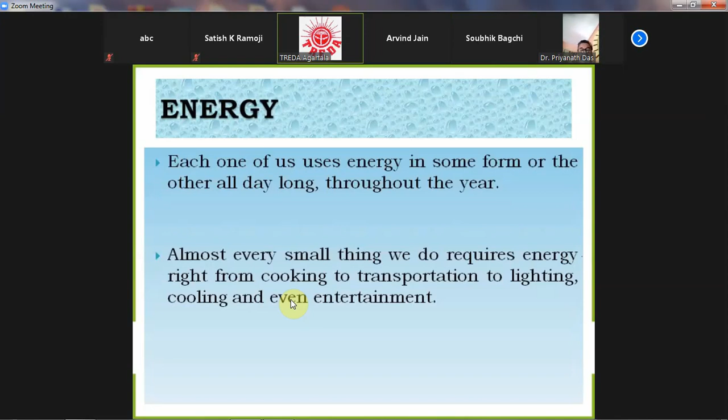Everybody knows energy is required each day for various activities, from cooking, transportation, lighting, cooling, even our entertainment. Energy is the prime mover of the development process. Energy consumption is correlated with our economic growth as well as our society's development. Economic growth calls for increasing use of energy, but the challenge is to meet this energy in a sustainable manner.

Today, the quality of life of individuals in our society is quite dependent on energy choices. Security of a nation mostly depends on the nation's energy resources and power sources, and India has fortunately developed some sources, both renewable and non-renewable. This lack of energy sources affects our human development, health access, education, socio-economic status, and environment. Today India is fortunate to have both of these sources.

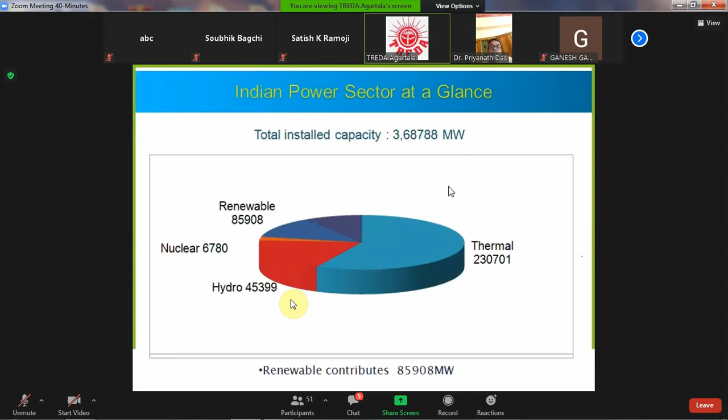If we see the power in our renewable and total power, the renewable share is actually 85,908, which is near about 22% of the total. But now the Government of India has decided that by 2030 there should be 40% - this is the target of the Government of India for renewable power contributing to the national grid.

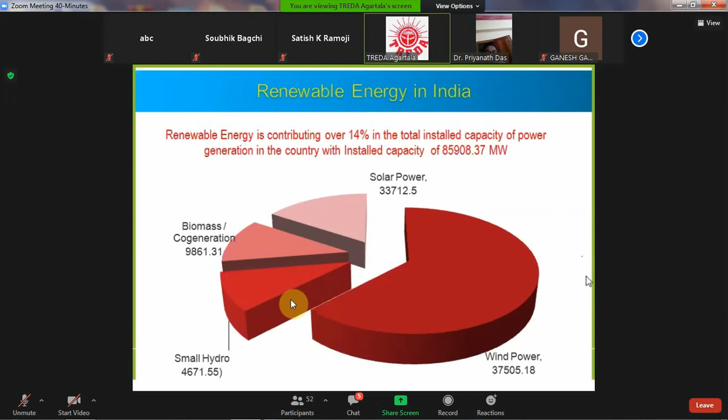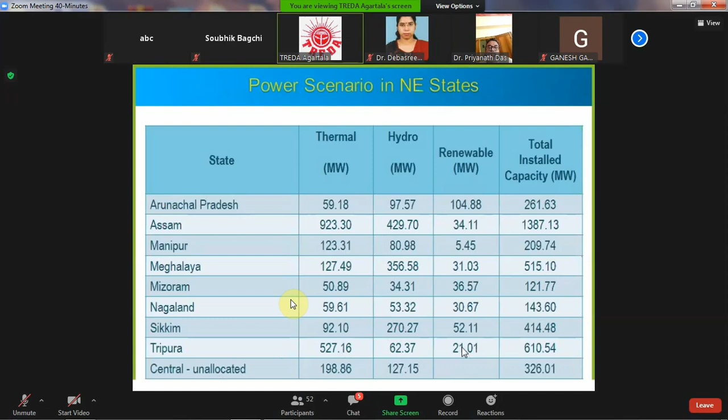If we see the power scenario in the northeastern states, basically in our Tripura, total thermal generation is 527, hydro is 62, and renewable from various sources is 21. There is one small micro hydel also, and this is our Tripura scenario of 610.

If we see the power peak demand in Tripura, this is 306. Roughly we have estimated that in Tripura we have already covered 191 households in our rural areas where grid connectivity is very difficult, because Tripura is a hilly, terrain area, so conventional power laying is not economically viable. So basically we are implementing renewable energy in those places.

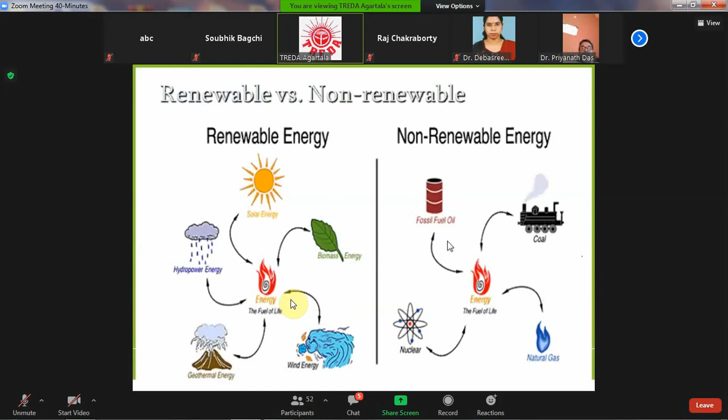Now this is basic - everybody knows the conventional resources are coal, petroleum, and natural gas. If we compare renewable and non-renewable sources, our renewable sources are solar energy, biomass energy, fuel, hydropower energy, wind energy, and geothermal energy. Our non-renewable conventional energy resources are fossil fuel oil, coal, natural gas, and nuclear.

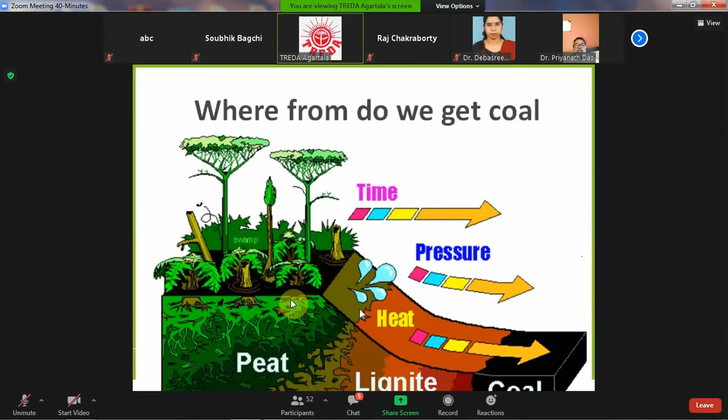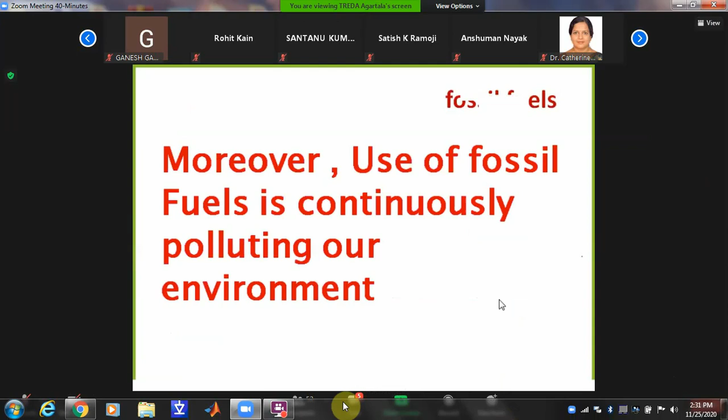We know how we get coal, and everybody also knows how we get petroleum gases and petroleum oil. But coal will last around 100 years, petroleum oil will last around 46 years, and natural gas will last around 63 years. Not only that, these conventional energy resources are also continuously polluting our environment, which is a very big threat to our human society.

Now people all over the world are thinking how we can save ourselves from this crisis and from this bad situation. Actually, there is...

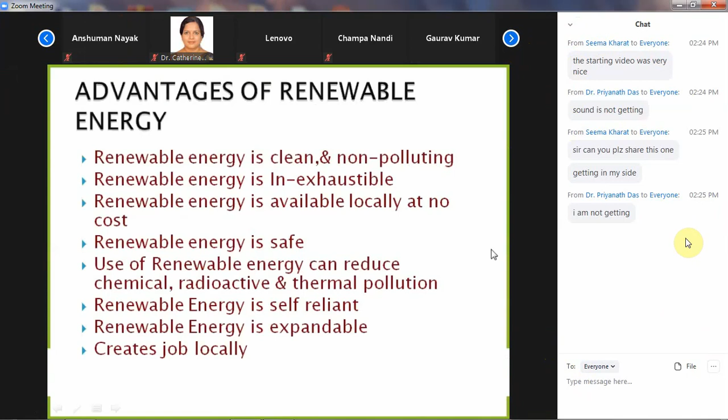Actually, there are three. First of all, we have to use energy conservation. Secondly, energy efficient appliances, and third is renewable energy.

There are three options, and the main advantage of using renewable energy is that everybody knows renewable energy is clean and non-polluting. Renewable energy is inexhaustible - we can renew this energy using the same source.

Renewable energy is available locally at no cost, because sunlight is everywhere, wind is everywhere, and water flow is everywhere. And renewable energy is safe - use of renewable energy can reduce chemical, radioactive, and thermal pollution.

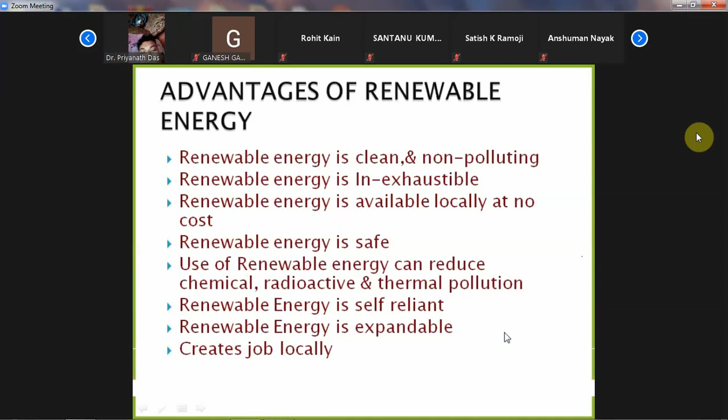And renewable energy is self-reliant. Renewable energy is expandable, we can expand it too. The main thing is use of renewable energy in areas creates jobs locally - this is employment generation we can also create by using renewable energy.

These include solar, hydro, wind, biomass, tidal, wave, ocean thermal, and geothermal. Everybody knows the amount of energy put on Earth by the sun in 15 minutes can meet the world's energy needs for 1 year. But how can we use it?

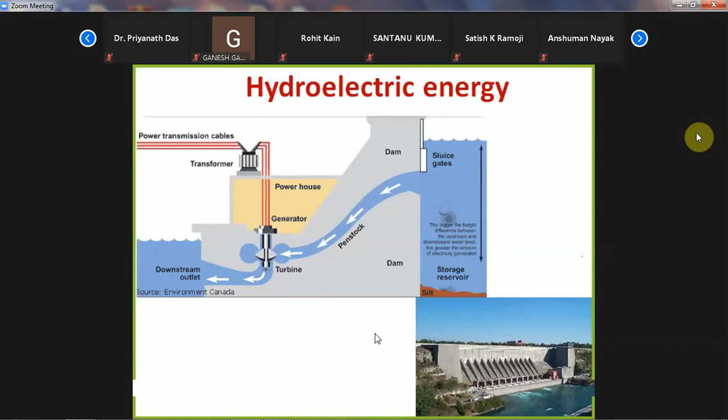Wind energy also can be used for generation of electricity. There is also a system for solar wind hybrid where wind and solar both are there.

We can also generate this. Mr. Shukla, yes. Hello, this is Arvind Jain. You just announced that Arvind Jain is speaking. Hello, Arvind Jain is speaking. Ah, yes, please, please. Hello.

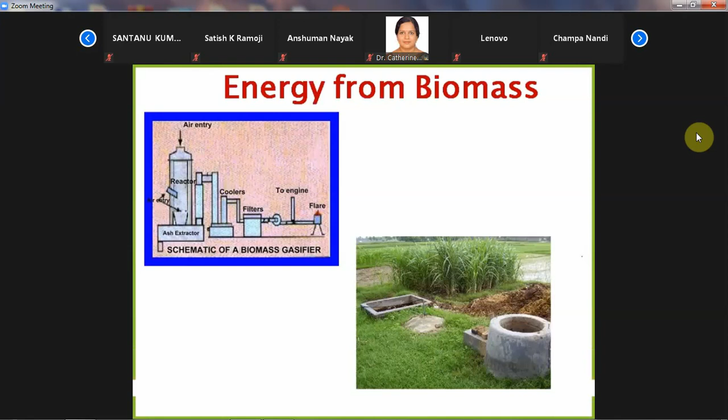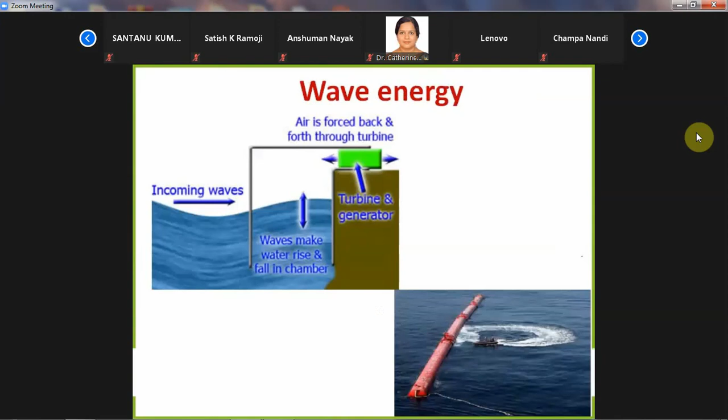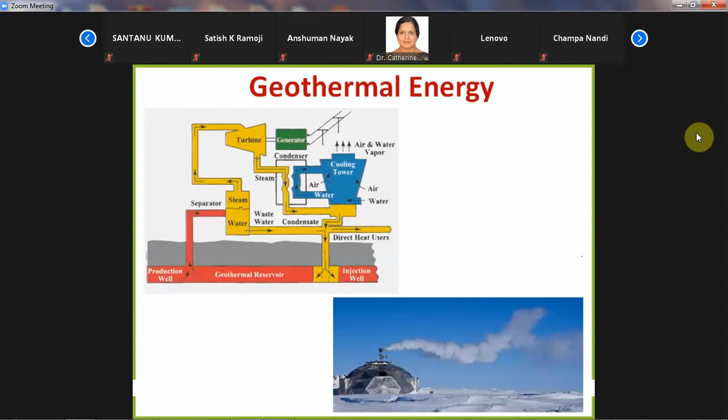Now I am covering the topic of renewable energy sources that may be used in rural areas. First of all, I'll go over some technology.

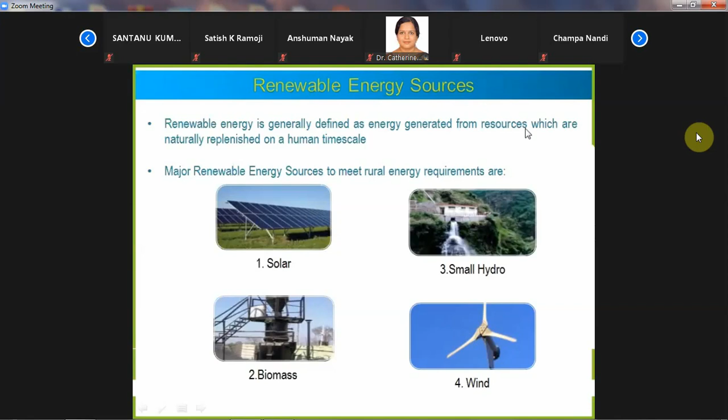Renewable energy generally refers to resources which are naturally replenished on the human time scale. The major renewable energy sources to meet rural area energy requirements are solar, hydro, biomass and wind - these are the resources we can use in rural areas.

for our energy needs. Everybody knows there is some energy budget of Earth.

The Sun gives actually 1372 watts per meter square of energy. What happens is some air, clouds, rain, and haze reduce our received surface energy, and it averages 345 watts per square meter less, around 1000 actually.

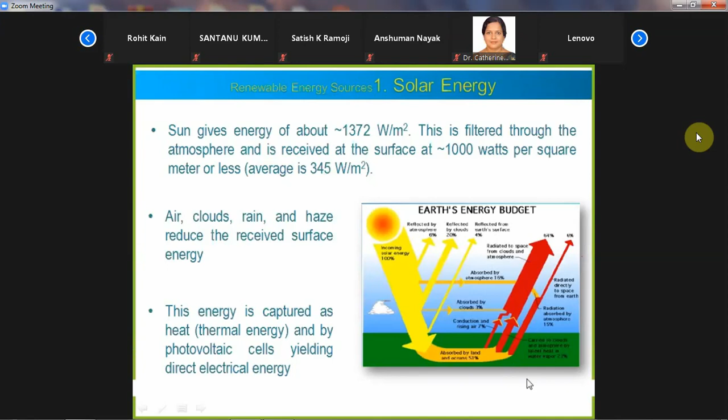And this is biomass energy - this is organic matter from recently living organisms, and it is also used as a source of energy. Basically, plant and plant-based materials that are not used for food or feed.

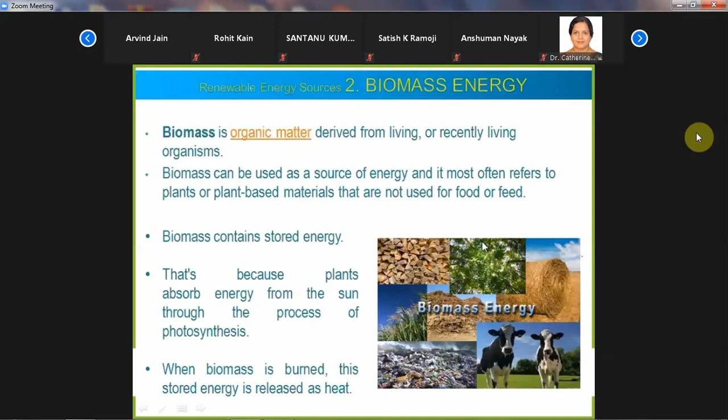And everybody we know, because the plants absorb energy from the sun through photosynthesis, and when we burn it, this energy came out and meets up our local energy needs.

And hydro energy is also there. This is our hydro energy. Basically, kinetic energy can be harnessed from the flow of water, and it can be used for generation of electricity. The most common type of hydroelectric power plant uses a dam on a river to store water in a reservoir.

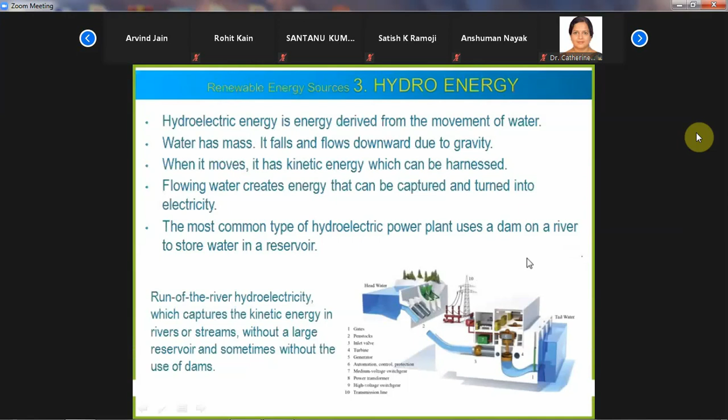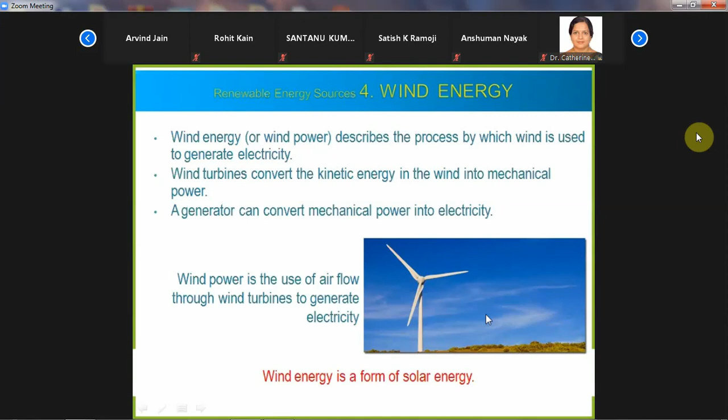And another is wind energy. The wind turbine converts the kinetic energy in the wind into mechanical power, and the generator converts mechanical power into electricity. This is the main fundamental of wind energy.

Now just in solar photovoltaic technology, if we use solar energy, there are two types actually. One is solar ray photon, and another one is the heat of the solar. So the solar photovoltaic technology actually uses the visible part of the sun's radiation, light actually, and converts it directly to electricity. This PV technology produces electricity that can be used for any type of electrical application.

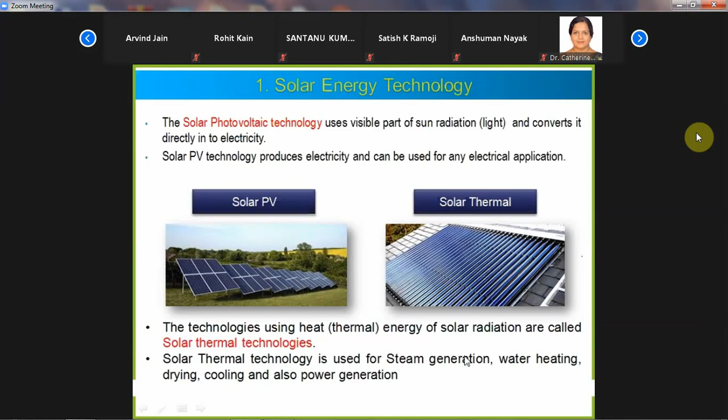And the other use is heat. In sunlight, heat is another application. By using this heat energy of the solar radiation, these are called solar thermal technologies. The thermal technology is used for steam generation, water heating, drying, cooling, and also power generation.

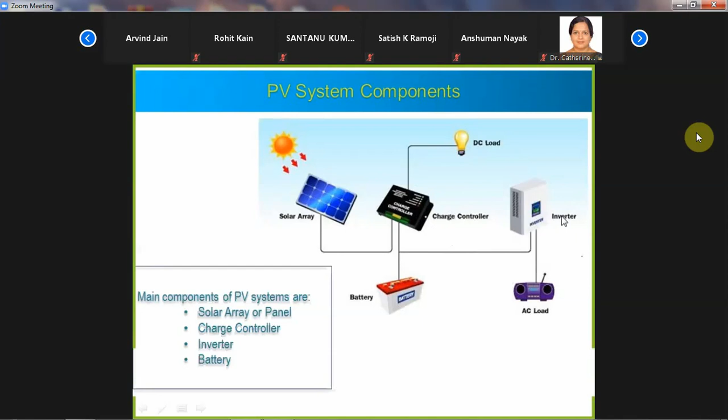This module generates electricity, and the charge controller controls the voltage and current and battery charging. At night time, when sunlight is not there, this stored energy is used for the load. We can use DC load also. Also, we convert this DC into AC by installing an inverter, and we can connect AC load also. This is the basic funda.

And if we go for thermal technology, there is direct, or by concentration, heat directly we can use. Also we concentrate this heat to give more temperature. This technology is also there. And there are three technology categories depending upon the output temperature: low temperature up to 100 degrees centigrade, medium temperature 100 to 300, and high temperature above 300.

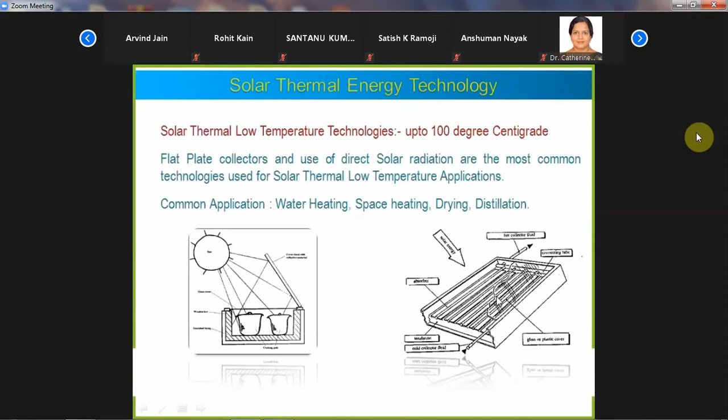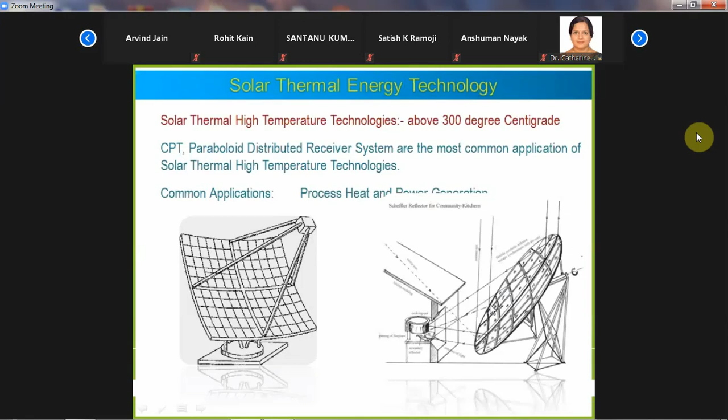And this is another one. The water flows through this pipe, absorbing heat, and the water is heated, then it will be used for water heating. This water heating, cooking, refrigeration, air conditioning, and distillation plants can also use it. This is various types of cooking systems. The heat is concentrated at one point and cooking is done there.

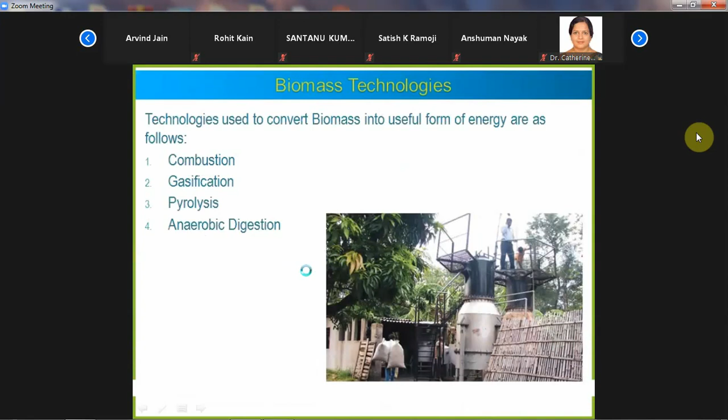And this is biomass technology. There are four types of technologies: combustion technology, gasification, pyrolysis, and anaerobic digestion. By combustion technology, we burn organic material. Humans have used this basic technology to create heat and generate power through steam, while wood is most commonly used as the feedstock.

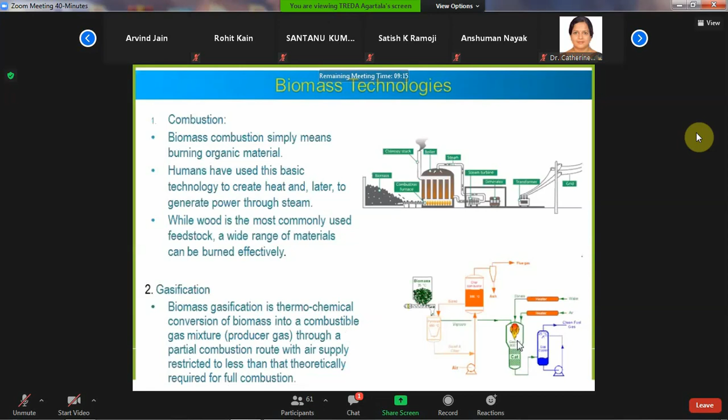Second is gasification. This gasification system is actually a thermochemical conversion of biomass into a combustible gas mixture through partial combustion, restricted to less than what's required for full combustion. This gas is called producer gas, and it is used in an engine to generate electricity.

And another one is pyrolysis technology. By this technology, we can get liquid biofuel at a temperature of 450 to 600 degrees centigrade. The organic material is burned, then cooled, and then bio oil is obtained, which is used for vehicles and other transportation purposes.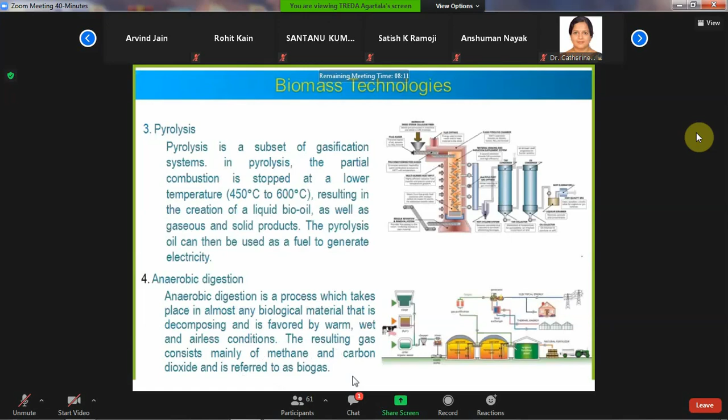And this is anaerobic digestion. Without oxygen, some organic material undergoes a biological process of decomposition, and gas is produced. Basically, the methane percentage is near about 77%. This gas is basically used for cooking purposes in rural areas. This is the main substitute for LPG.

And if we go for hydro, small hydro generation of hydroelectric power on a scale serving a small town, small village, or a small industrial plant - we can also operate by this small hydropower. In India, hydro projects up to 25 megawatt station capacity are called small hydropower. Above 25 megawatt capacity is called big hydropower plant, but up to 25 it is called small hydropower. Small hydropower is further classified: micro hydro up to 100 kilowatt, mini hydro 101 to 2000 kilowatt, and small hydro 2001 to 25,000 kilowatt.

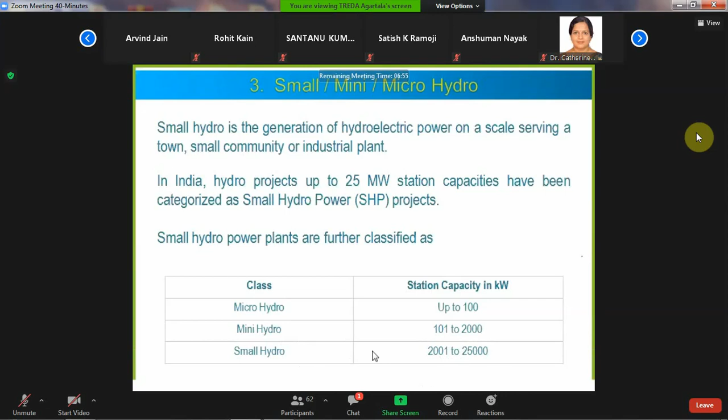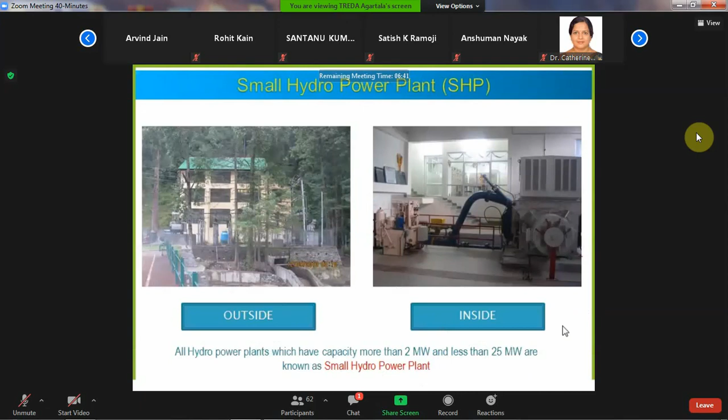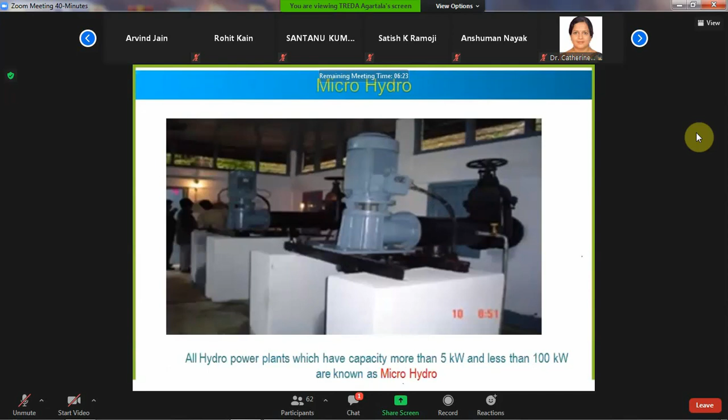This is the small hydro, outside 2 megawatt to less than 25. And this is the mini hydro, where any stream or heat-prone area can also be used for the generation of mini hydro. There is also very small micro hydro, 5 kilowatt up to less than 100 kilowatt. This is pico hydro, less than 5 kilowatt. Any small type of stream from the hill can also be used by pipe, and we can generate this electricity - very small electricity we can generate locally.

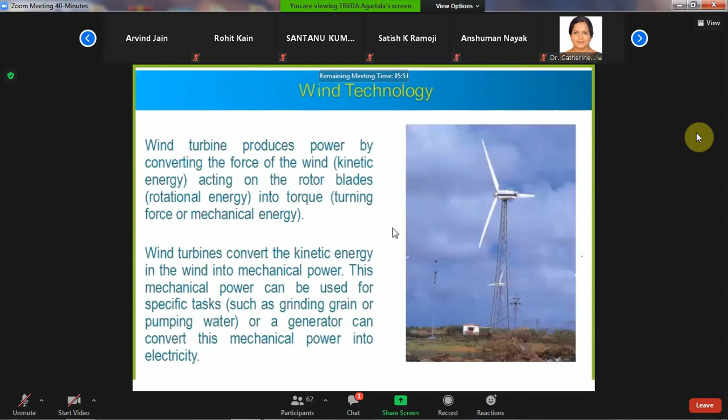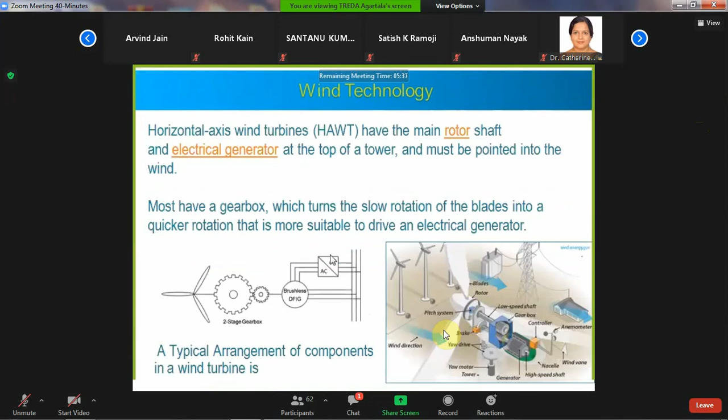By wind energy, everybody knows wind turbines produce power by converting kinetic energy through blade and turbine into mechanical power. There are two types of turbines. We can use this for electricity, and an electrical generator can also be used.

So these are the main resources. How can this technology be used in rural areas? Now, what will be the available gadgets? What will be the available technology by using this technology? We can promote accessibility of energy in rural areas.

I can just show this slide. In many rural areas, electric connection is very tough, everybody knows, because it is very expensive and may take years to reach. Basically in our northeastern states, it is very tough to reach every corner with grid line electricity because of hilly terrain, and it is also economically not viable. Second, in storm or rainy season, some defects occur in the distribution line, and maintenance and rectification may take 2 to 3 months. So it's not the solution for rural areas for providing energy - renewable energy adoption is the best solution in our rural areas.

Further, grid connectivity does not fully address the need for sustainable heating and cooking options. Heating and cooking in rural areas is not possible by grid connectivity, and renewable source technology can effectively address the needs of rural remote areas.

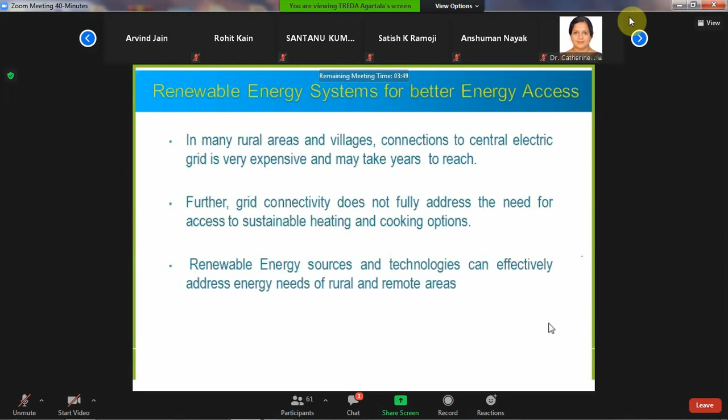Typically, for which purpose is this energy required?